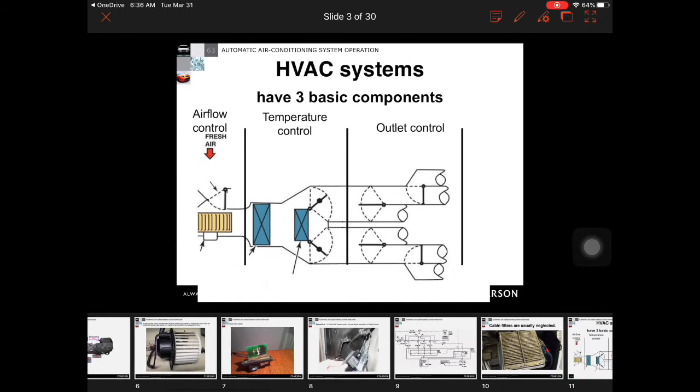I want to start talking about what the temperature control section is. So the temperature control section contains everything necessary to change the temperature of the incoming air. It really is going to include the following components. First and foremost, it's going to be the evaporator core, which cools and dries the incoming air. The heater core, which warms the incoming air. And then the temperature blend door. This is going to allow the outgoing air to reach any temperature between full hot and full cold. Okay?

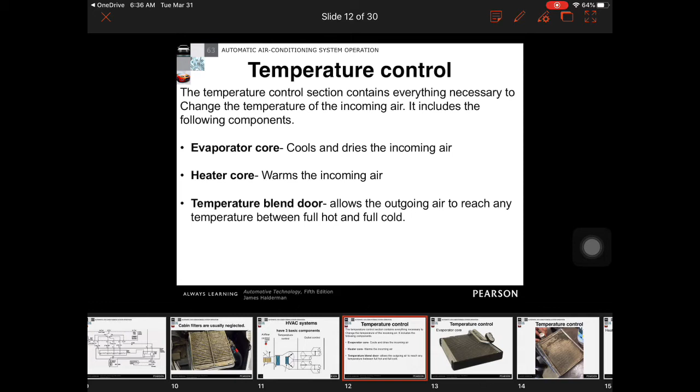Okay, so now the first component we're going to get to in the system is the evaporator core. So this is an evaporator core. It's going to look pretty similar to a heater core, but let's take a jump over and let's look. This is a heater core. This is an evaporator core. So there is a couple differences. I know they both look like big chunks of aluminum with fins in them, but it's hard to see in this picture, there is actually one tank here and another little tank here. So there's actually two separate tanks welded onto this one.

And the big easy way for us to be able to tell that this is going to be the evaporator core, if we see these pipes right here that come up to this little block. So this is a connection to our expansion valve that we're going to learn about later. So if you see this, it's pretty well a dead giveaway that it is going to be part of the AC system. Okay? The evaporator cores are pretty much always built out of aluminum.

I can't tell you the last time I've seen one in a different color. Usually the evaporator cores themselves are built out of aluminum. Okay? So as I said earlier, all of the air is going to have to come through the evaporator core.

And the reason it is called an evaporator core is that the Freon is actually coming through this, and it is going to be coming into one tank, going across these fins, and as it's going across this, there's a pressure drop inside there, and the Freon itself begins to boil. And when the Freon boils, it drops in temperature drastically, and that allows the incoming air to be cooled. So we're absorbing the heat from the air into the aluminum of the evaporator core.

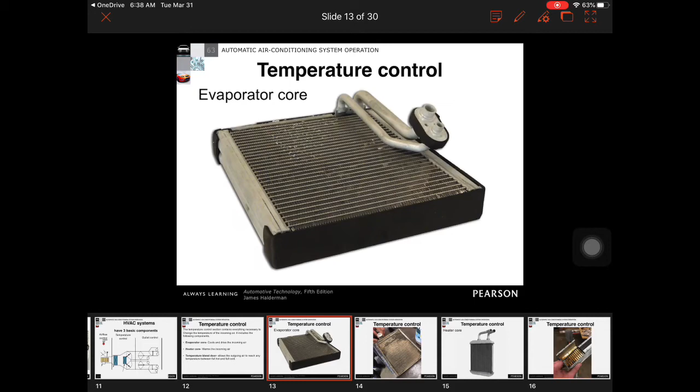We'll learn more about how that process works when we actually get to talking about the AC system itself. But this is going to reduce the temperature of the incoming air, okay? Now there's one important thing I want to talk to you guys about. We talked last Friday about a cabin filter.

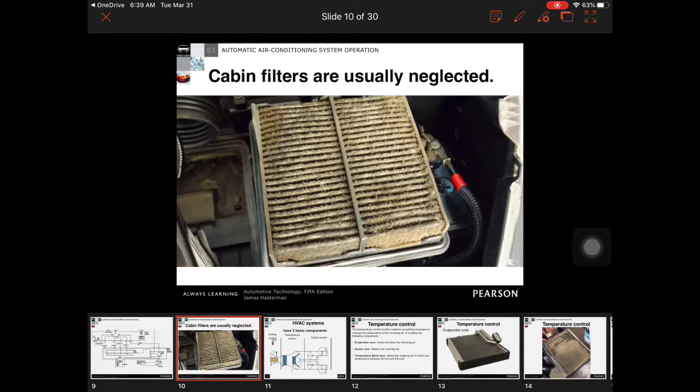And you see this cabin filter is really nasty and has a lot of fuzzies. Well, there's a couple really good things about that. One that we talked about before, this isn't getting into the occupant compartment now, which is really nice. But if we have that cabin filter, it eliminates the chance for the AC evaporator to look like this. So if we don't have a filter in our vehicle and we are driving in dusty environments, something is probably going to collect that.

So one thing about the evaporator is that when we have a drastic drop in temperature, we are going to condense water out of the air, because the air can only hold so much water, and the amount it can hold is based off of the temperature. The higher the temperature, the more moisture it can retain. As that temperature drops, the point at which it has 100% humidity and starts to condense liquid out of the air is called the dew point.

So once we get below that dew point, we're going to start dropping water off of it, which is why we have to have an AC drain and why you always notice water underneath your car when the vehicle's running. The downside is that moisture is dropping off of the evaporator, so it's a wet environment right here. Those little dust particles are going to start getting stuck in that moisture, and eventually it cakes up.

So if we see really reduced airflow and we don't have a cabin air filter, the next thing I'm probably thinking is I'm going to try to get a borescope in here and see if I can see the evaporator, because there's a good chance it's going to look like this. This is a fairly common thing. Most vehicles now do have air filters, as long as somebody didn't take it out. But especially in work vans in dusty environments continually, this is unfortunately fairly common.

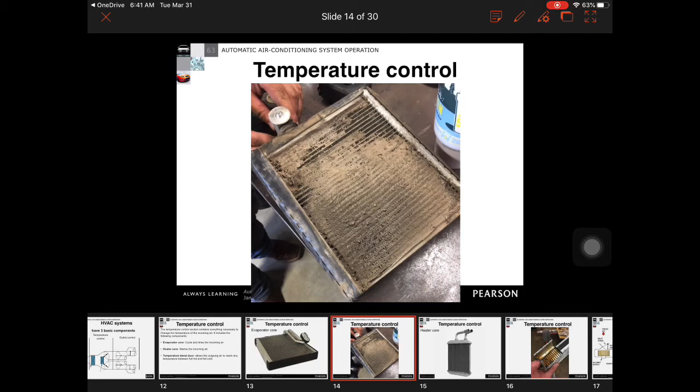Okay, so the next thing I want to talk about is a heater core. The heater core is a little bit different. We only have one tank on the top and the bottom. It's physically a little bit thinner. And we just have two heater hoses coming off here at the top. So this is connecting right into the cooling system, and we're just going to have coolant flowing through this. This is going to act exactly like a small radiator.

Basically, this radiator is just inside of the vehicle. All of the heat generated by the engine has to be dissipated somewhere, and the radiator does about 90% of that, 100% if it's summertime. With the radiator, that heat is getting wasted. We're not able to use that energy for anything helpful. However, when it's cold outside, we run a fan through the heater core, and we're able to utilize some of that heat energy to heat the occupant compartment and maintain comfortable temperatures inside the vehicle.

Okay, so with the heater core, usually there's a couple ways we're going to see this fail. One way is a leak somewhere in it. Typically that happens with the solder joints, where these little metal tubes go into the tanks. One of those solders will start to leak, and eventually we'll see coolant getting the floor wet inside the vehicle. And the other way we'll see it fail is by the heater core itself getting plugged.

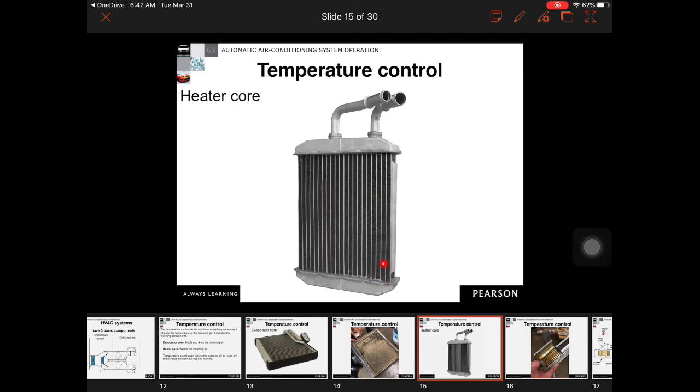So if we have a heater core that does not flow properly, we have to try to back flush it first, which means we unhook our hoses and we take water and we try to actually force water through the opposite way it runs, and we flush all this nasty coolant out. If you've ever flushed a heater core, the first time you flush it, man, it just looks nasty. It's just about brown when it comes out.

Then we flush it the other direction. We go back and forth until we get nice clean water coming from both directions. And hopefully we were able to rejuvenate this heater core and get most of the dirt out. Now, I'll be the first to tell you, you're probably never going to get it 100%. There's always going to be at least one of these tubes that's probably going to be obstructed, and you just can't get it cleaned.

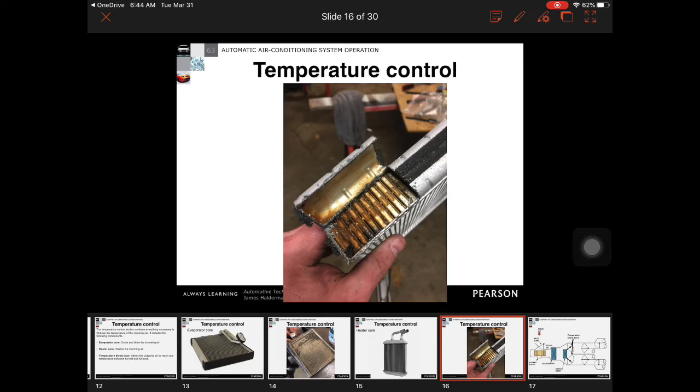There are other things that we can do. We can actually try to use a chemical flush. However, we do have to be careful. If we look, the tubes here are actually really thin, so there's not a lot of meat on the side there. That chemical flush is basically a weak acid. It's going to be able to attack this dirt and crud and all the other crap that's in there, and hopefully free our system up.

The downside is that it will also attack the aluminum to a certain extent, and left in there too long it will actually eat right through the aluminum components. So we've got to be careful about that. You've got to make sure you follow directions when you're doing a chemical flush. Not that it doesn't work, we just have to be careful about it. So the two big failures for a heater core are if the system is physically plugged and coolant can't flow, and if the system is leaking externally, and we have to replace it that way.